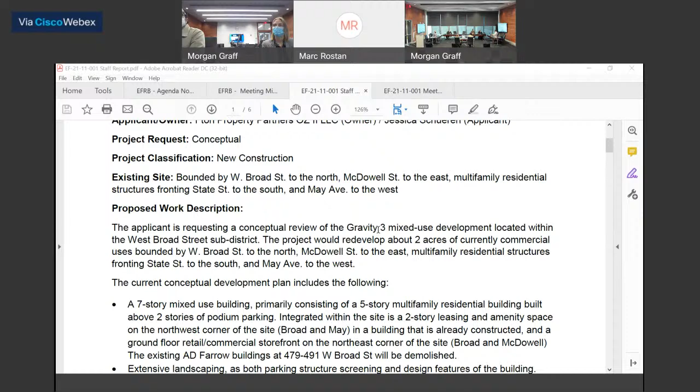Current conceptual development plan includes the following: a 7-story mixed-use building, primarily consisting of a 5-story multi-family residential building built above 2 stories of podium parking.

Integrated within the site is a 2-story leasing and amenity space on the northwest corner of the site at Broad and May, in a building that was already constructed, and a ground floor retail commercial storefront on the northeast corner of the site at Broad and McDowell. The existing AD Farrow buildings at 479 to 491 West Broad Street would be demolished.

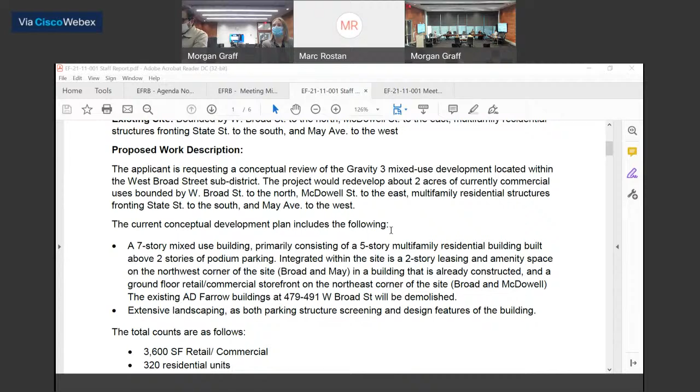Extensive landscaping will serve as both parking structure screening and design features of the building. Total counts: 3,600 square feet of retail and commercial space, 320 residential units, and 360 parking spaces. The submittal includes a conceptual site plan, floor plans, elevations, and renderings.

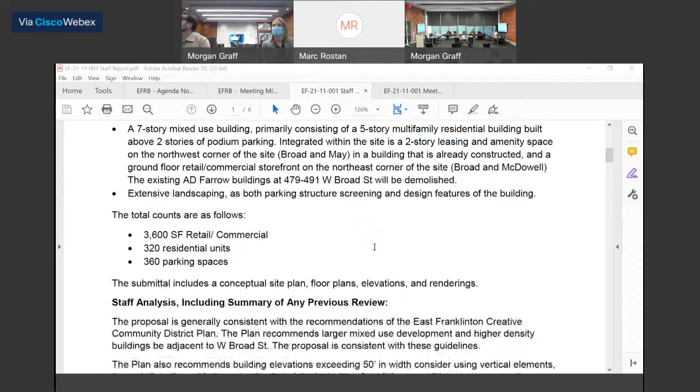The proposal is generally consistent with recommendations of the East Franklinton Creative Community District Plan. The plan recommends larger mixed-use development and higher density buildings be adjacent to West Broad Street. The proposal is consistent with these guidelines.

The plan also recommends building elevations exceeding 50 feet in width consider using vertical elements, that existing alley grids be maintained, and the inclusion of publicly accessible open space on the ground floor.

Staff note the presence of vertical piers and landscaping and screening of the parking structure along the east and west elevations, and recommend additional design treatments to provide relief at street level along McDowell and May.

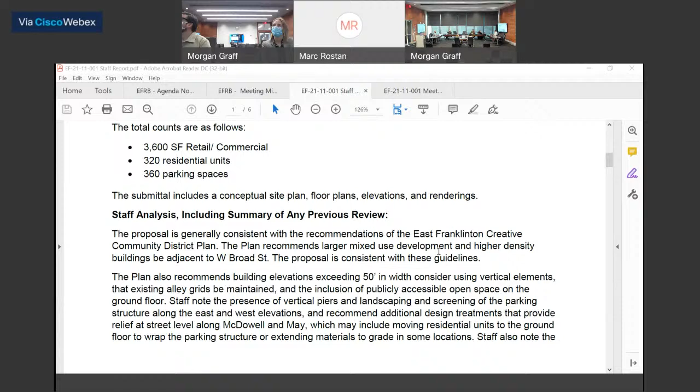This may include moving residential units to the ground floor to wrap the parking structure, or extending materials to grade in some locations. Staff also note the vacation of the alley between McDowell and May, as well as the absence of ground floor open space. The proposed height of 7 stories is also inconsistent with plan recommendations.

However, staff consider the height compatible with the nearby Gravity 1 and 2 structures and is therefore supported.

Lastly, the plan recommends historic and contributing buildings be preserved and incorporated into new development to the extent possible. Although the existing structures at 479 and 491 West Broad Street are greater than 50 years old, they are not considered contributing structures. Staff, however, encourage the existing building at the corner of West Broad and McDowell to be reused.

Reusing the building would further integrate new construction with the existing fabric of the West Broad streetscape, provide additional relief along the McDowell Street elevation, and allow retail uses to wrap around the corner of the site for further activation of the street. Staff recommend design modifications including the inclusion of a ground floor publicly accessible open space and street trees along all frontages as appropriate.

I realize I have that listed again down here, but info on existing street trees as well, and consideration of more vertical relief along the east and west elevations.

Staff encourage the incorporation of the existing building at the corner of West Broad and McDowell into the design, consideration of ground floor residential units or usable space to wrap the parking structure, the inclusion of a more prominent entrance on the May Avenue elevation, and additional information on how the proposal relates to the neighboring developments to the south.

Well, thank you very much. I appreciate it. I know it's a short week, so thank you for the time.

We're excited to present what we're calling Greenhouse at Gravity. It's the third phase of our gravity project here in Franklinton. As Marc mentioned, we're presenting conceptually, so we're not asking for a vote today.

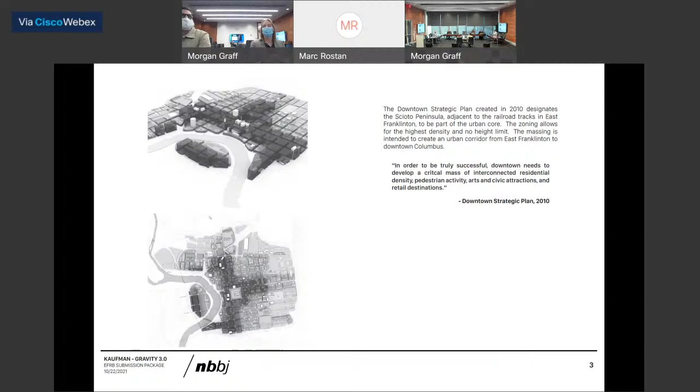Greenhouse as a brand is centered on and inspired by the natural world and all the wellness that comes with it, so it will be rich with greenery and natural elements, and will include amenities that enhance the greenhouse vision and experience, such as saunas, treatment rooms, hot tubs, and cold plunges. It's a bit of a departure from the Gravity brand, which was more experiential and transcendental with bright colors. We're switching more to a green and natural feel here, but we still feel it's a great complement to the Gravity community.

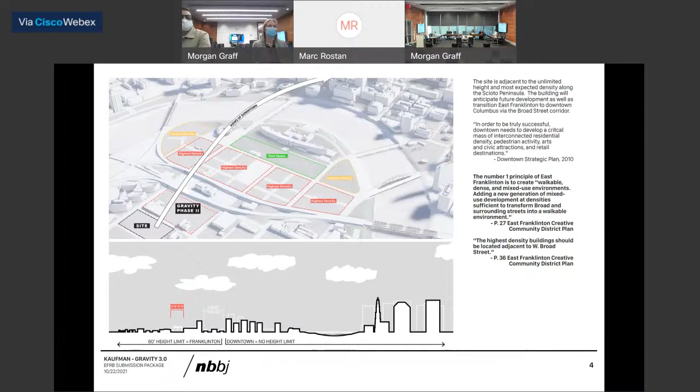As Marc mentioned, Greenhouse will include plus or minus 320 residential units, 3,600 square feet of retail or commercial space along Broad, 9,000 square feet of interior amenity space in an existing building at Broad and May, exterior rooftop and courtyard amenities, and a 360 plus or minus stall secure garage for our residents.

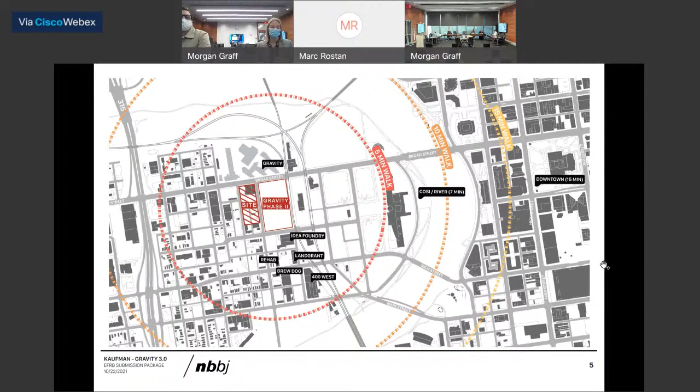The project will be 5 stories of wood over 2 stories of podium parking. We also plan to include interactive elements, interactive art, and sculptural elements throughout the project, as you can see in some of these renderings, as well as pedestrian-facing seating elements and greenery. We're also working on either a dog park or a pocket park on the southwest portion of the site, taking into consideration additional elements that make it a great neighborhood experience.

So I will hand it over to Mike to walk through the design. He's with NBBJ, and we can then answer any questions.

So thanks, everyone. Just reiterating what Jessica stated, we're really excited to continue some of the work we've been able to partner on relative to the concepts and the architecture of this zone in Franklinton.

With each iteration, we've been able to work on Gravity 1, Gravity 2, and now Greenhouse at Gravity. One of the things we've kept talking about is the conceptual and contextual richness of this part of the city, how it relates to downtown, and how it creates its own atmosphere. I think this wants to be a real continuation of that.

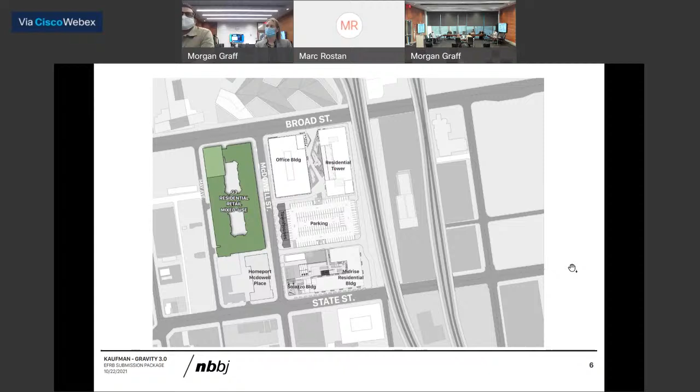One of the things that distinguishes this from the previous two phases is, as Jessica mentioned, going toward something that looks and feels more naturalistic, with a softer element to the materiality. We started to explore that a little on the 12-story tower with the high performance concrete panels at the exterior.

We're translating that aesthetic and materiality in a different way to this site. As we looked at the project overall, you can see from this axon the relationship of the 12-story tower relative to the Murphy building, and then across McDowell to this portion.

In some ways, there's a mirror of that street of McDowell to what we're seeing on our block. Broad Street is one of our city's main thoroughfares, so we considered the difference between that street and our two flanking north-south streets, May and McDowell, as we laid out this plan.

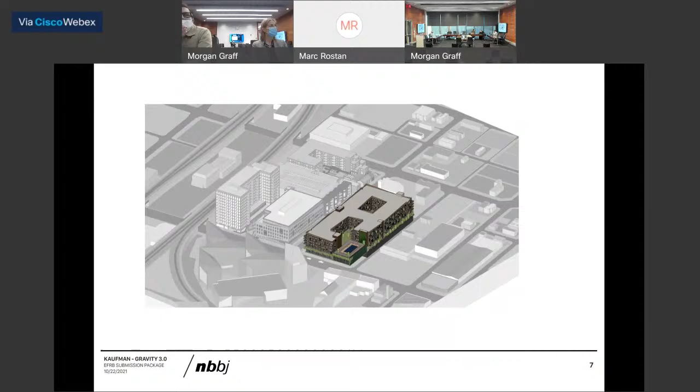We talked initially about how to get that relative to Broad Street and how the planning could extend and use that as an element supporting community, some kind of amenity. So we've really tried to leverage that corner portion as a way to organize the program.

That ends up becoming this kind of special moment in the project that will serve almost as a front door.

The plan then has two courtyards, both north and south. Those relate to the top of that amenity space and link to it physically on top. And then we create that gap at the corner as you get to the massing of the building, so we really try to highlight that architecturally.

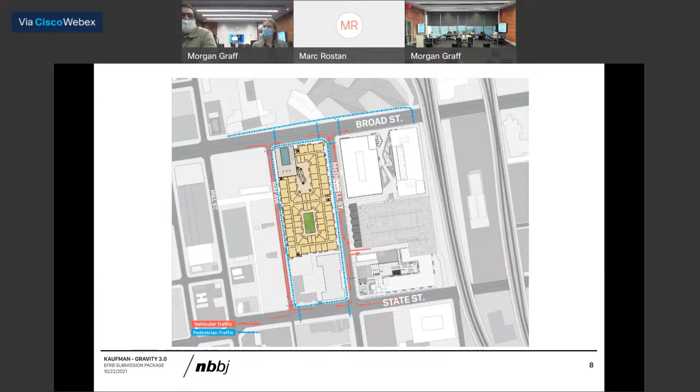The project is fundamentally a residential project on top of a podium with retail at Broad. You can go to the next slide.

These start to indicate that basic organization. You can see the retail at Broad wrapping the corner—we're at about 3,600 square feet there, while 9,000 is the other building. And you can see the parking behind.

Architecturally and from a planning standpoint, we're trying to understand the best way to adequately park the program but also create some life on the street. That's been a real focus in terms of how we can get that McDowell elevation to partner with Gravity 2 to create a pedestrian-oriented street.

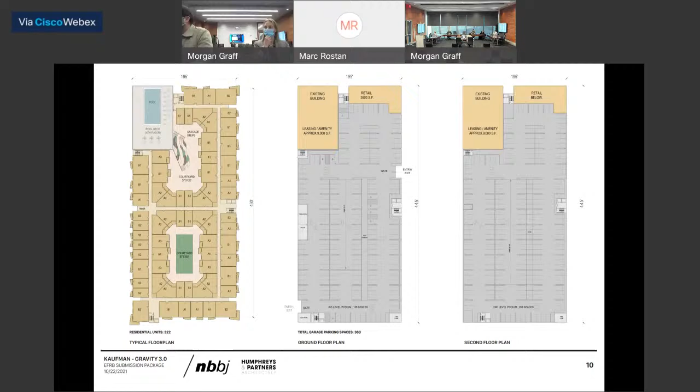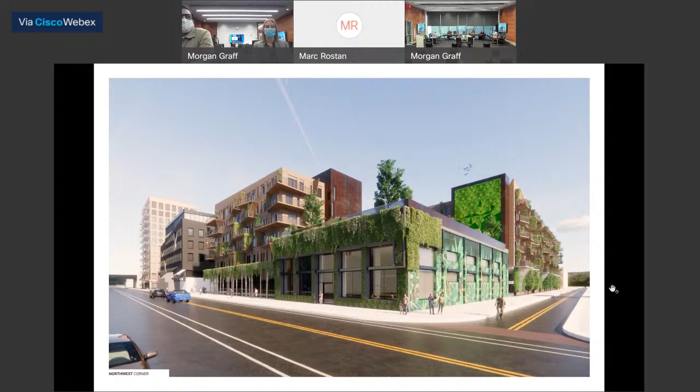As we start to think about expression of materials, I mentioned the focus on this corner piece as almost a front door. There are some really great spaces on the inside in terms of the raw nature of the structure, which I think complements the rest of Gravity really well.

In talking with Jessica and Brett and Kaufman, they really wanted this to have that naturalistic element. As a design element, we want to investigate what a living wall looks like—not too dissimilar from what's happening across the street at Gravity 1, but aiming to tie it in while applying what we've learned, so it functions well for our climate and supports this soft, living element on the street.

We'll carry that language to the east, in front of the retail. We're aiming to create some relief off the street on Broad with that retail element. You can see that colonnade creates some depth on the street and some space, and then that turns and wraps the corner down McDowell.

I know there were some comments around the verticality, breaking up the length of the building. Obviously this doesn't go the entirety of the block, since we have the Homeport project to our south. Some of the things we aim to do: we have portions of the project where we naturally come down to ground with either stair towers or lobbies that serve the residential, but then there are also natural breaks where the retail starts and stops around that corner.

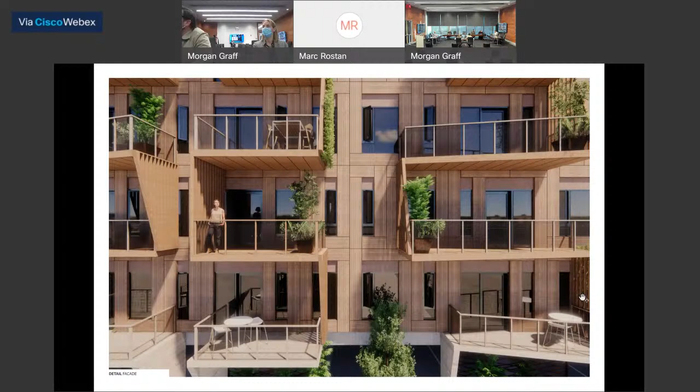Go to the next slide—this is a more detailed version, or blow up, of one of those facades. You can see we're really looking at a metal mesh for railings, and then a pretty rigid window, creating some economy with the sizes of the windows and openings. But really the balconies and those vertical elements are going to be the stronger read of the facade, so we're trying to keep that backdrop or field facade a little quieter.

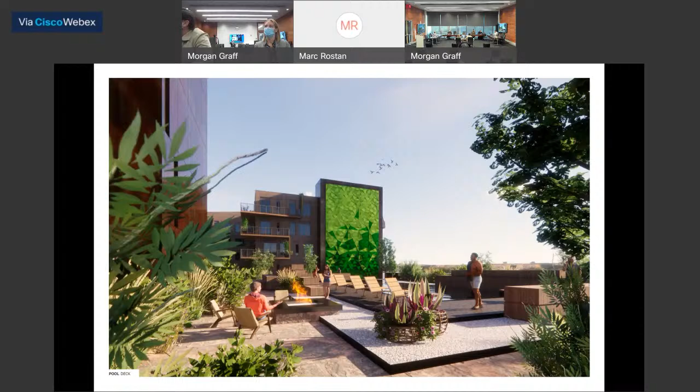And then another view at the McDowell Broad corner, and a view on top of the existing building. We've also been exploring a glazed terracotta, some kind of art sculptural wall that isn't necessarily figural, but has an element that reflects some of the patterning that we see in and around the Gravity campus.

So, some suggested materials—we are looking at different variations on, in terms of type 5 construction, we have to have non-combustible materials. So we're looking at different skin systems that reflect and show that warmth. A wood look is kind of what we're going for, so we've looked at some aluminum products, we've looked at some cementitious products, but overall trying to imbue that color.

You'll notice across the Gravity campus we've got some very monochromatic black, gray, white buildings. We've also got in the tower some warmer, more earthy types of materials, and I think that's what we're going for here. So you'll see some Corten panels, a green wall, living wall, and those wood-type panels.

And just the elevation kind of reflects what I was noting before. You can see those vertical elements as they march up and through the building in the north-south direction, as well as some of the east-west.

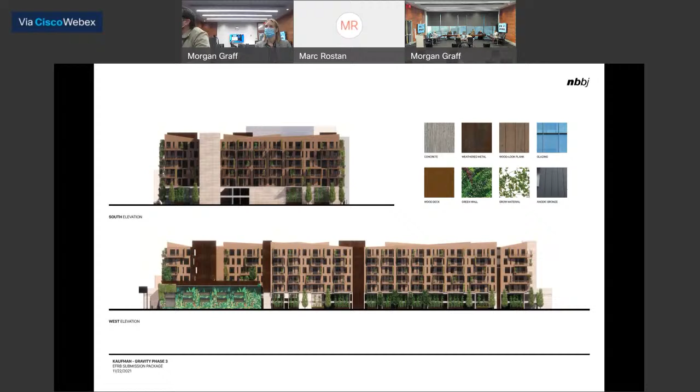That might be the end of it. Yep, I think that is.

The appendix just has some inspirational images of what the interiors might look like. Those are from a project here in the Short North, also a greenhouse project. So while we haven't really gotten into that design yet, we wanted to provide a sense of what might go there, what that feeling might be, and some images of the interactive art we've been exploring and how it's worked in other installations.

I should note that for the podium, our team has been looking at different plant material that we know would be good for our climate. We've looked at bamboo. We know it can grow to be pretty dense and also pretty tall, and we think it would complement the aesthetic Kaufman's going for here.

Where are you talking about that? So that would be at the podium level where you see the balconies come down. We're looking at structured planter boxes. Right now they're shown as Corten in the images, and those would have the vertical elements. And between those, we've also been looking at trees, so the streetscape and those vertical pieces would complement and offset one another.

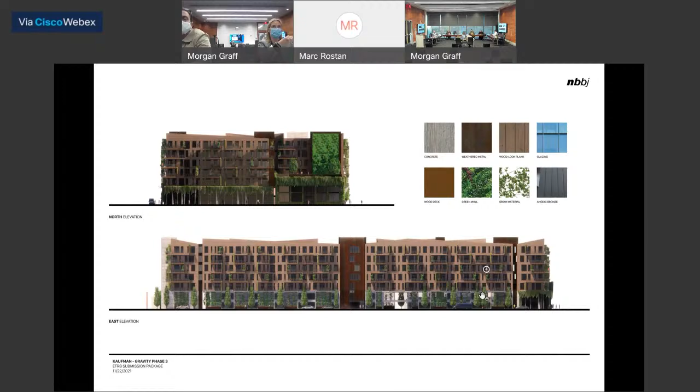There will also be an entry off of Broad directly into the retail or commercial space. Our primary entrance for residents will be along McDowell, or if you're a resident who works at Gravity Phase 2 or parks at Gravity Phase 1, but otherwise most will be parking in the garage, and there are 3 or 4 different points of access from the garage up to the units.

Hear ya loud and clear, Bart, 100%. That's something we've discussed a lot in terms of what is going to make McDowell special and make it this activated, energetic street. We think we've actually pushed the building back 4 to 5 feet, depending on the side of May and McDowell, from the property line so we can create some interest and activation.